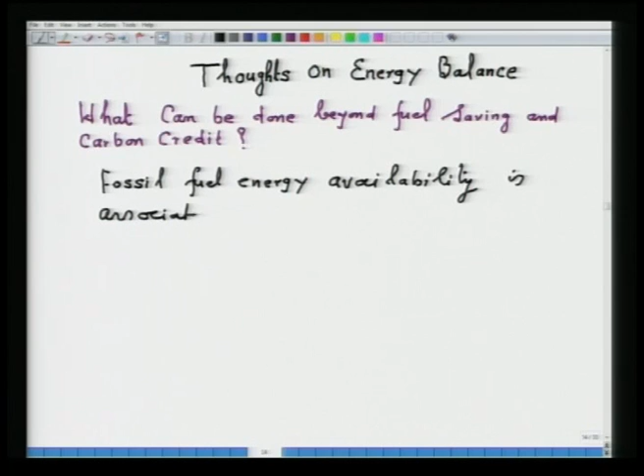is associated with discharge of CO2 in the environment along with other harmful impurities. It is also associated with unutilized thermal energy carried by, or rather carried by, say, product. So far we have not paid any attention to the product, and by-products of combustion.

In the product, there are several types of products being produced. For example, you heat the steel, so steel discharges at 1200 degrees Celsius. So the product, depending on the objective, could be steel, it could be slag, it could be coke oven gas, because your objective is to produce coke. So far we have not addressed what can be done by the heat which is carried by the product.

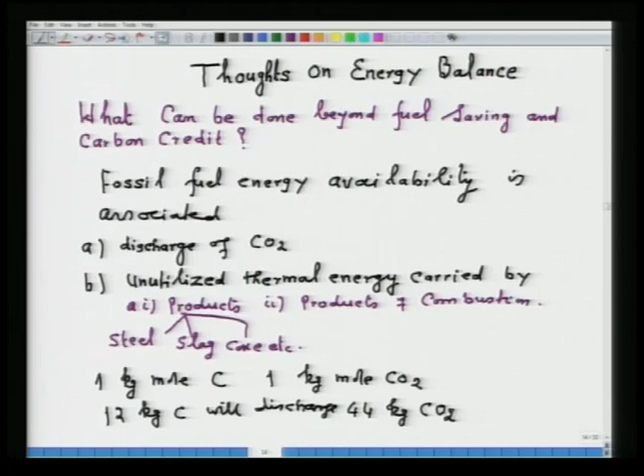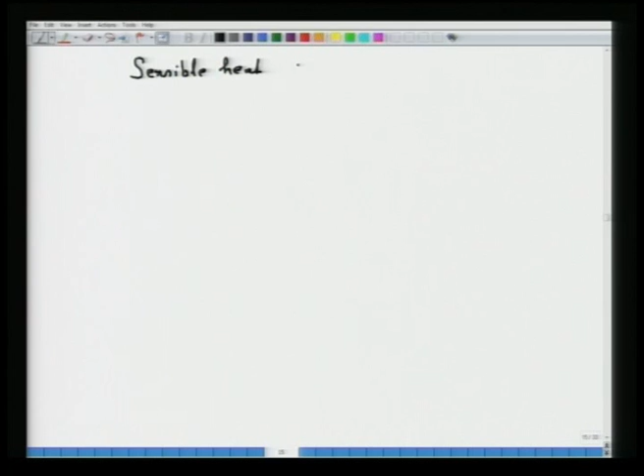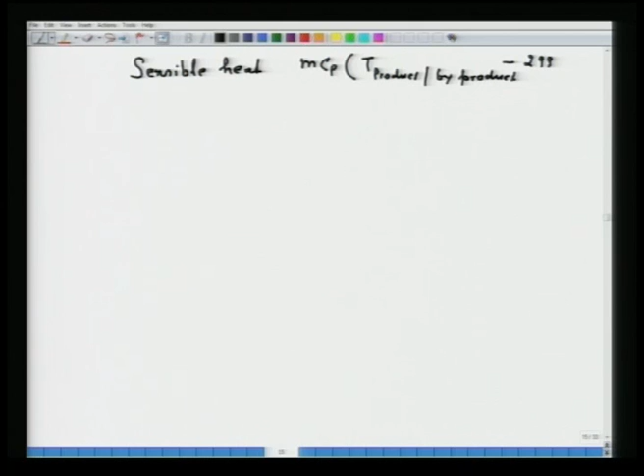This is one particular thing, and also we have said that a large amount of heat will also be carried away by the product and products of combustion, and that heat we call sensible heat. So sensible heat, I am not talking at the moment of calorific value, I am talking of the sensible heat, that is M Cp T of product or byproduct minus 298, if 298 Kelvin is taken as the basis of calculation. Depending on the temperature of the product, a large amount of sensible heat will also be carried away.

We have already addressed what can be done with the sensible heat of the byproducts. We have tried to recover it, recycle it into the furnace, and did a lot of calculation. Now, the sensible heat is also very important. Say in byproducts, for example, the gases are there, and they are discharged also at 1100 or 1200 degrees Celsius depending on the temperature of the furnace. Unless the gases are cleaned, they cannot be used directly. But then what happens to the sensible heat of the product?

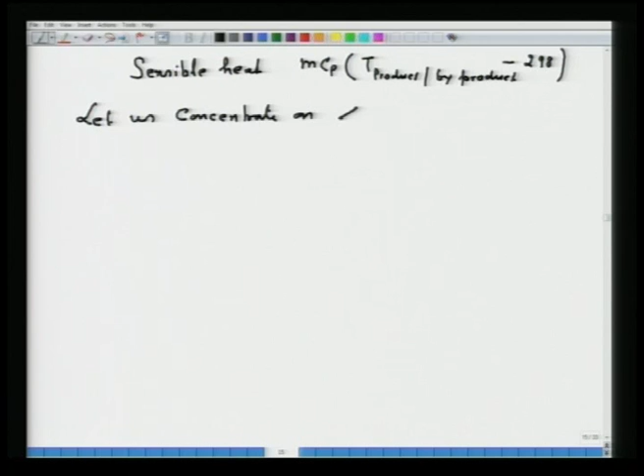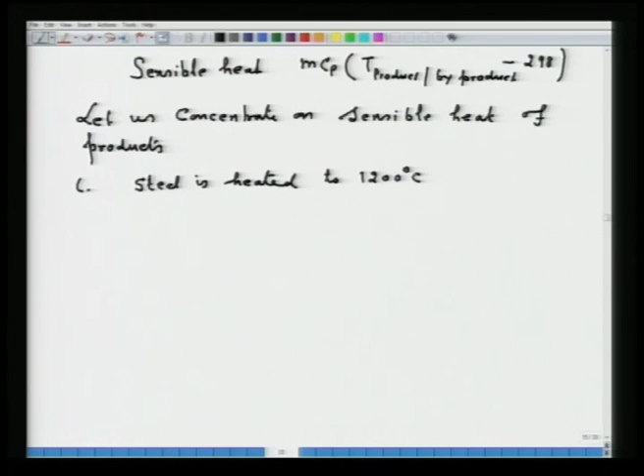Now let us concentrate on sensible heat of products. So the example, for example 1, for thermomechanical processing, steel is heated to approximately 1200 degrees Celsius, and the heat available with the steel is then utilized for thermal mechanical processing, that is for direct rolling.

You must have also seen in coke making, coke is discharged at around, let us say, 1200 degrees Celsius. It is very difficult to store the coke at this particular temperature. So for this purpose, coke is water quenched and brought to the temperature of 25 for storing purposes. In an attempt to water quench coke, a large amount of water is used. Water contains large amounts of contaminants, and large emissions due to wet quenching of coke are discharged into the environment.

What I have thought, let us consider coke making and what can be done with the sensible heat of coke. So I will concentrate now my lecture on the sensible heat in coke.

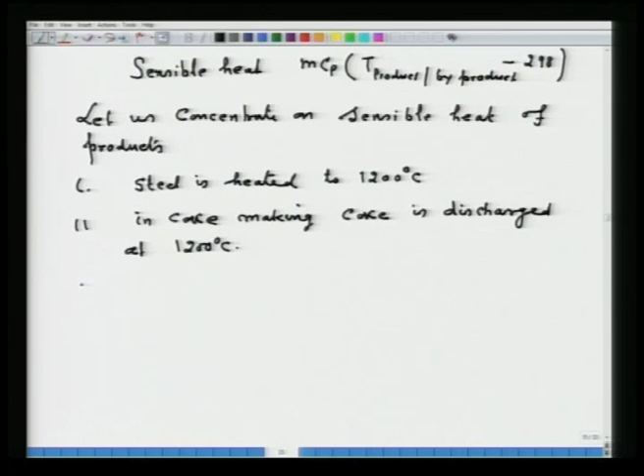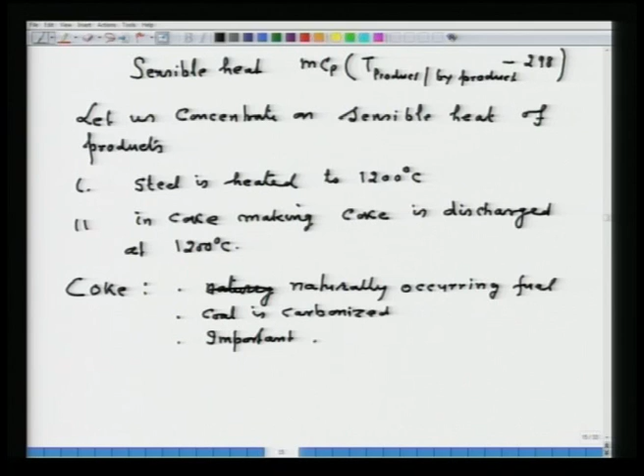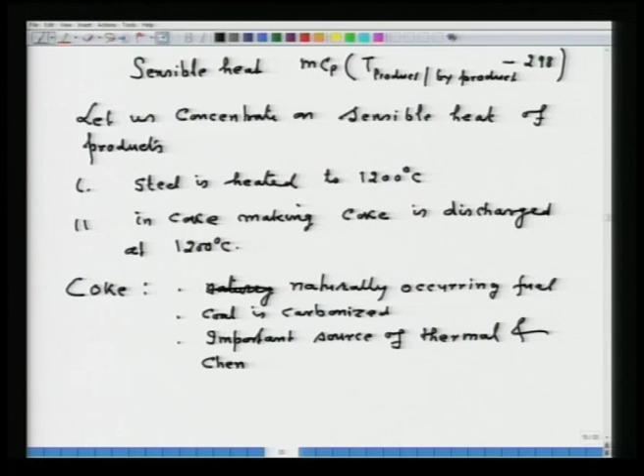Now, first of all, as we already seen in the lecture on coke making, for example lecture 27, coke is not a naturally occurring fuel. Number 2, coal is carbonized; the details you can find in lecture 27. Also, coke is an important source of thermal and chemical energy in integrated steel plants.

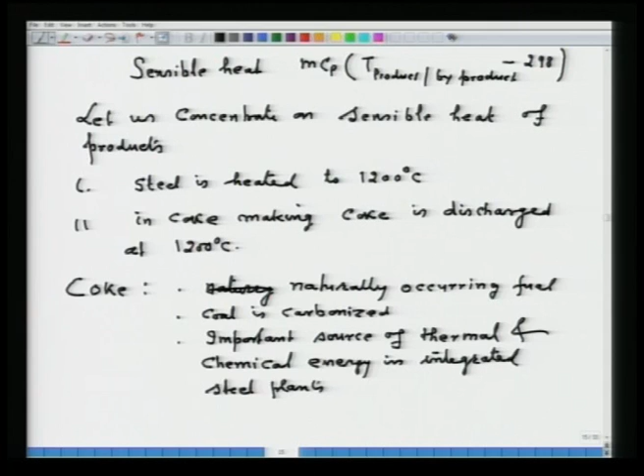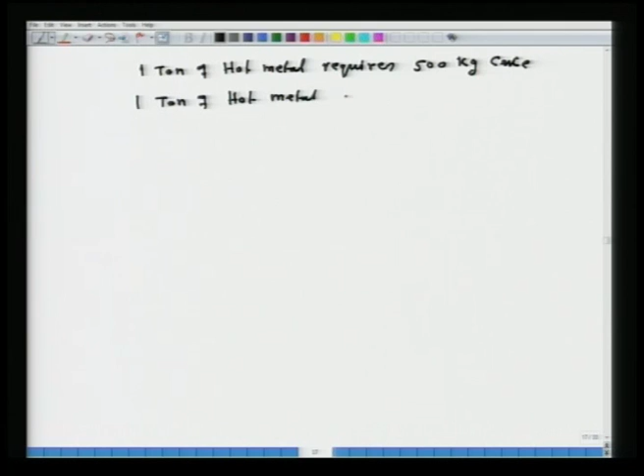Now, just to give you a figure, say 1 ton of hot metal, hot metal meaning pig iron, requires approximately 500 kg of coke. The figure may vary, but I am just taking an example. 1 ton of hot metal produces approximately 0.75 tons of steel. Now, 1 ton of bituminous coal,

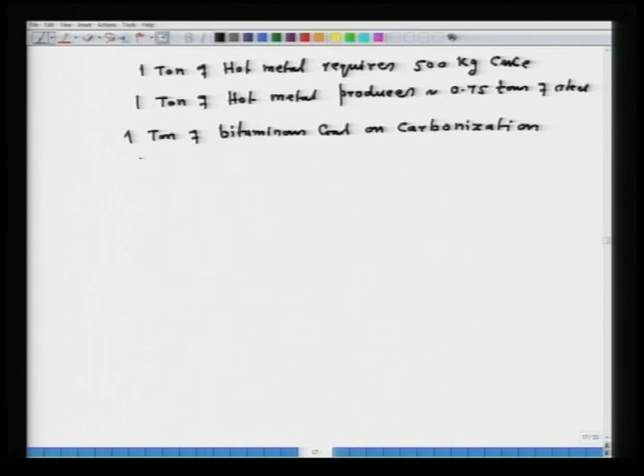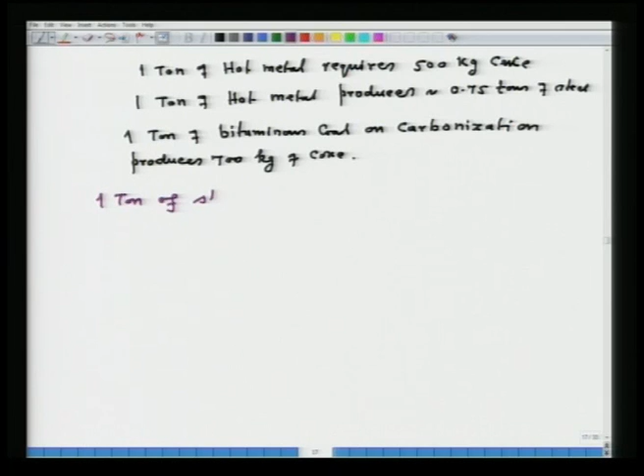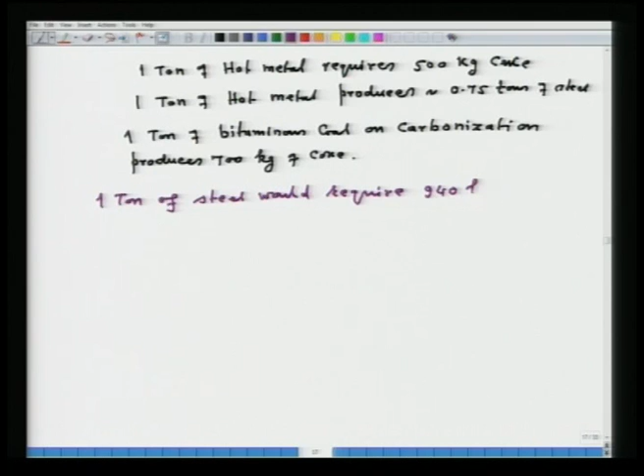on carbonization, say, produces 700 kg of coke. That means, if I combine all together, I can say that 1 ton of steel would require 940 kg of coal. If I take now 10,000 tons of steel, that would require 9,400 tons of coal,

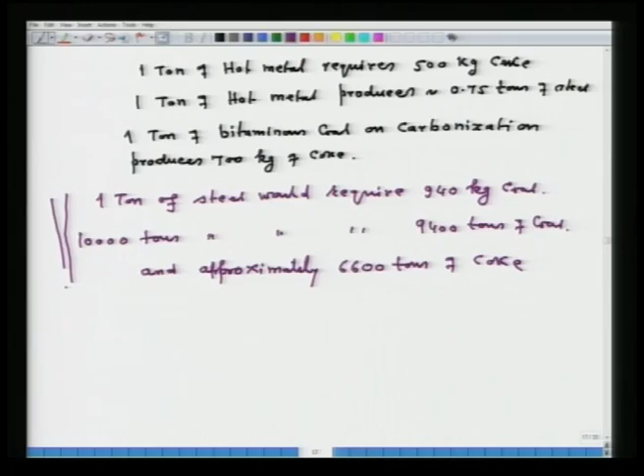and approximately 6,600 tons of coke. What does it mean? You are not producing just 10,000 tons; annually you are producing million tons of steel. A huge amount of coke is required in almost all integrated steel plants. So that means the conversion of coal to coke, and the sensible heat available in coke, is a very important thing to consider in what can be done.

So, what I have thought now, let me give you a heat balance of a typical byproduct coke oven. So let us consider now the heat balance of a byproduct coke oven.

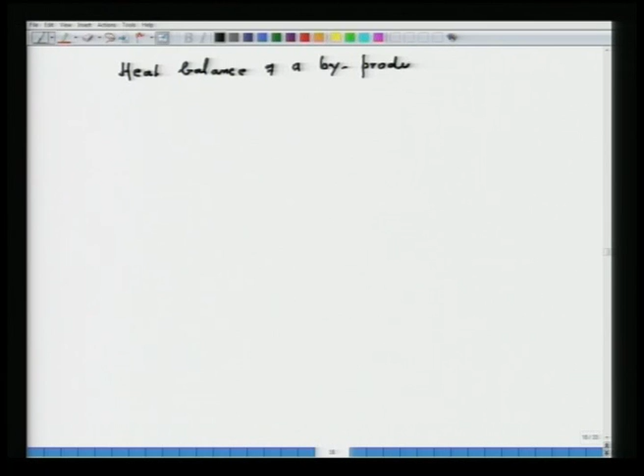Now I have selected heat balance vis-a-vis material balance. First we did material balance in coke making in lecture 27. One of the examples I presented there used the material balance data to illustrate the energy balance, or heat balance, here. So I am putting it now in the form of a diagram presenting the heat balance.

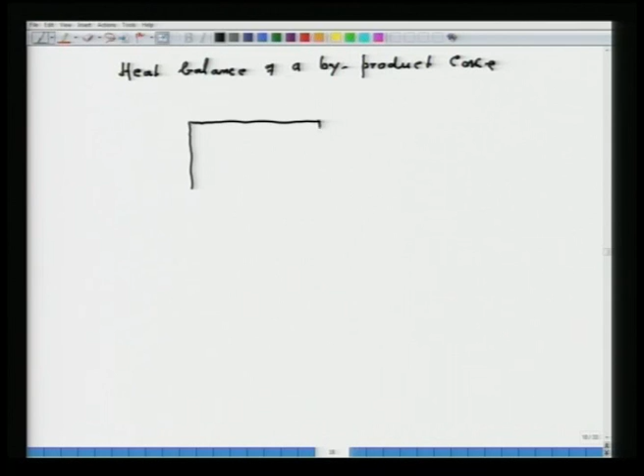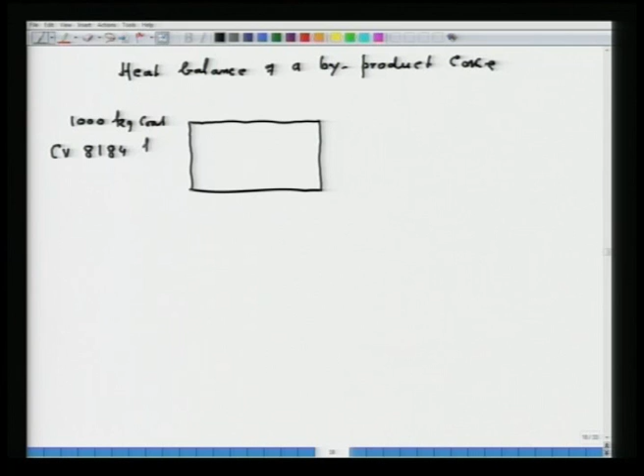So here what we are doing: I am putting 1000 kg coal, whose calorific value is 8184 kilocalorie per kg. CV, as you must know, stands for calorific value.

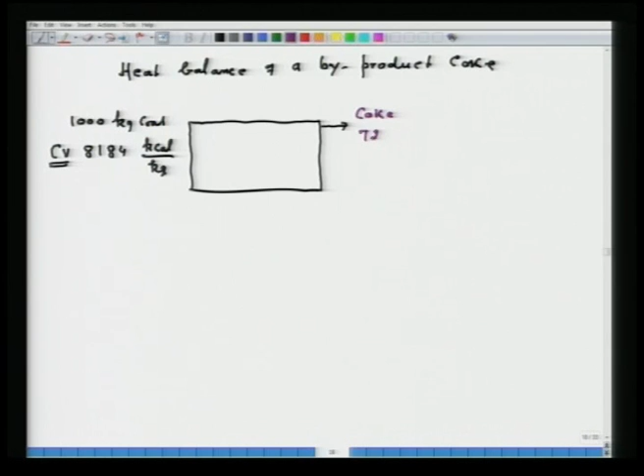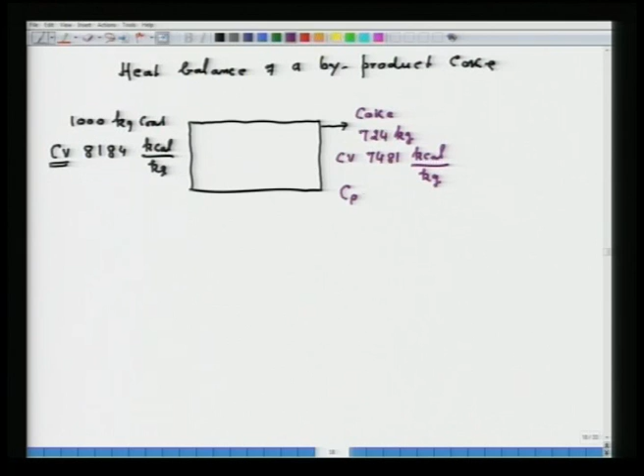On discharge we get coke, its amount is 724 kg, its calorific value is 7481 kilocalorie per kg, its Cp is 0.359 kilocalorie per kg per degree Celsius, and it is discharged at a temperature of 1200 degrees Celsius. That is what we are considering.

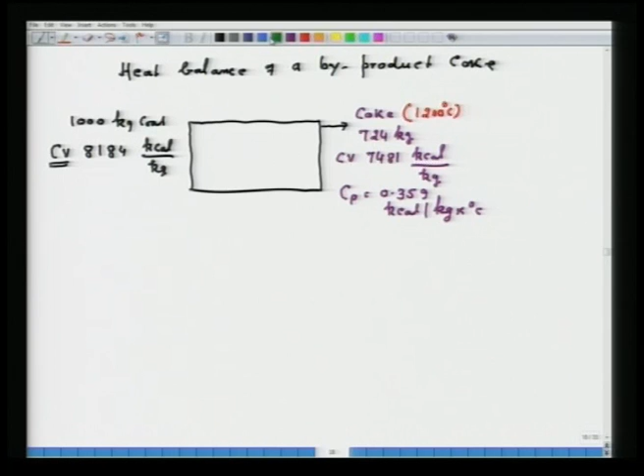Another product, as shown, is tar, whose amount is 40 kg and its calorific value is 8776 kilocalorie per kg. It is also discharged at 1200 degrees Celsius.

Then another product is coke oven gas, whose amount was 349 meter cube, calorific value 113 into 10 to the power 3 kilocalorie per kg mole, and its density is 0.44 kilogram per meter cube.

Now, let us take this coke oven gas: 40% of the coke oven gas is burnt and used to reheat the walls of the byproduct coke oven. You know there is indirect heating involved.

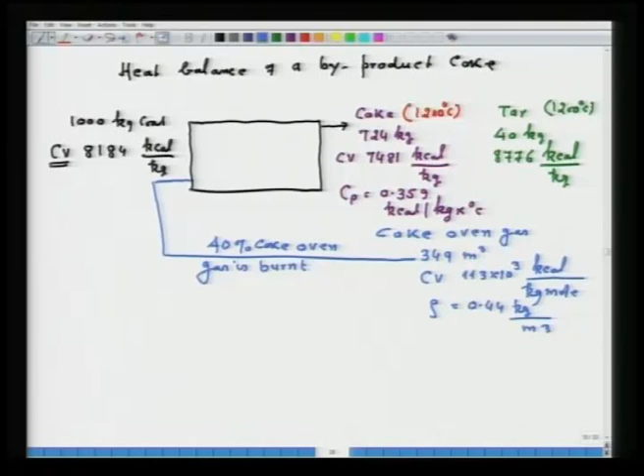Given all these figures, now we can do the heat balance and let us see what the heat balance brings. I will use the next page to do the heat balance now.

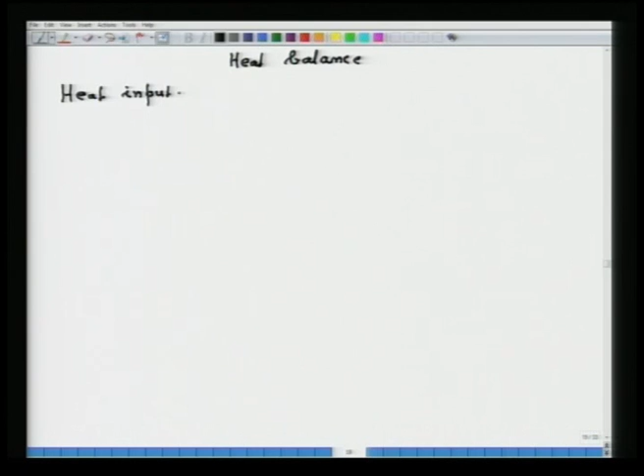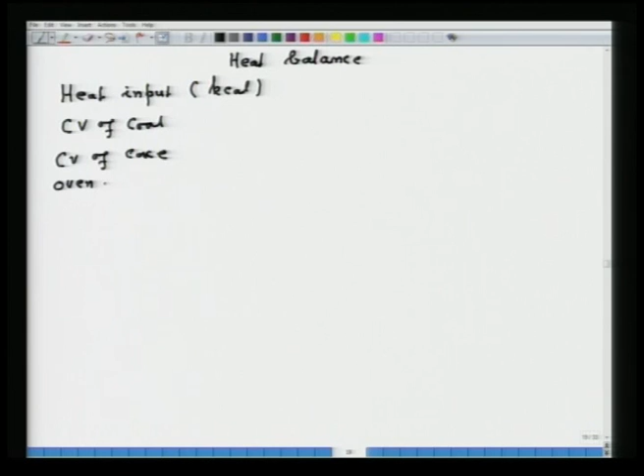Typically, heat input in kilocalorie: CV of coal, then CV of coke oven gas because we are combusting it. CV of coal is 8184 into 10 to the power 3, and CV of coke oven gas is 704 into 10 to the power 3.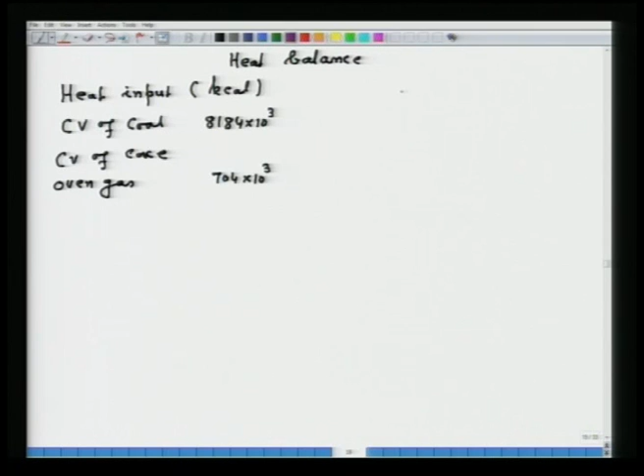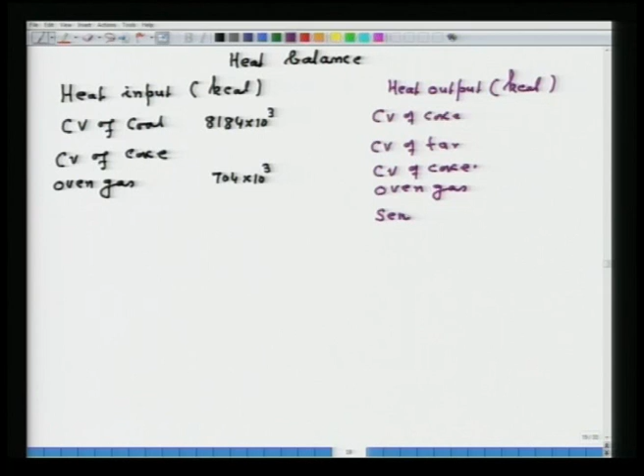Now let us go on to the heat output, again in kilocalorie: CV of coke, CV of tar, CV of coke oven gas, then the important terms sensible heat in coke and sensible heat in coke oven gas.

Now let me concentrate on sensible heat in coke and sensible heat in coke oven gas. The values are: CV of coke 5416 into 10 to the power 3, CV of tar 351 into 10 to the power 3, CV of coke oven gas 1053 into 10 to the power 3, sensible heat in coke 305 into 10 to the power 3, and sensible heat in coke oven gas 174 into 10 to the power 3.

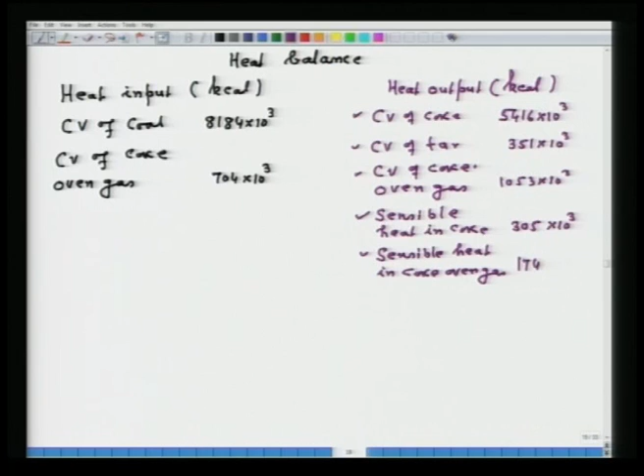This is the heat balance picture before us. The calorific value of coke is not lost even in water quenching; on combustion this energy will be available, no problem. CV of tar is also available since it is potential energy. Similarly, calorific value of coke oven gas is also available, related to potential energy, which you get on combustion.

What about sensible heat in coke oven gas? The coke oven gas contains a large amount of entrained particles, so you have no option except to cool and clean the gas, and you can use only its potential energy. Unless the gas is very clean, the sensible heat of coke oven gas cannot be used. Any gas containing entrained solid particles is difficult to use because it will contaminate the appliances used to recover the heat.

Now, what happens to sensible heat in coke in this particular case? Sensible heat in coke cannot be used because it has to be wet quenched in order to store it; you cannot store coke at around 1200 degrees Celsius.

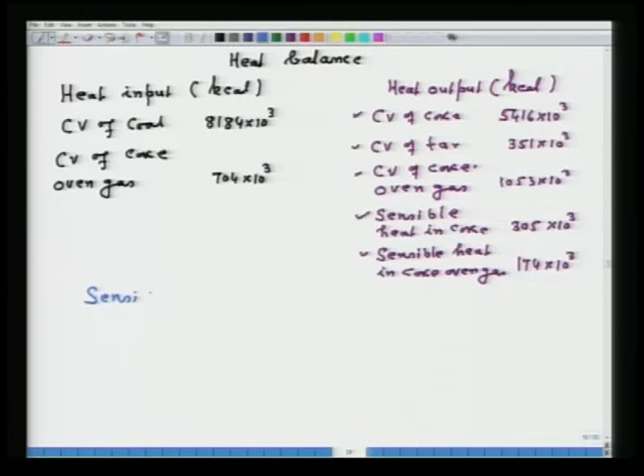So that means the sensible heat in coke, which is very large in amount, is at present 305 into 10 to the power 3 kilocalorie per 724 kg of coke, which is equivalent to 436 into 10 to the power 3 kilocalorie per ton of coke.

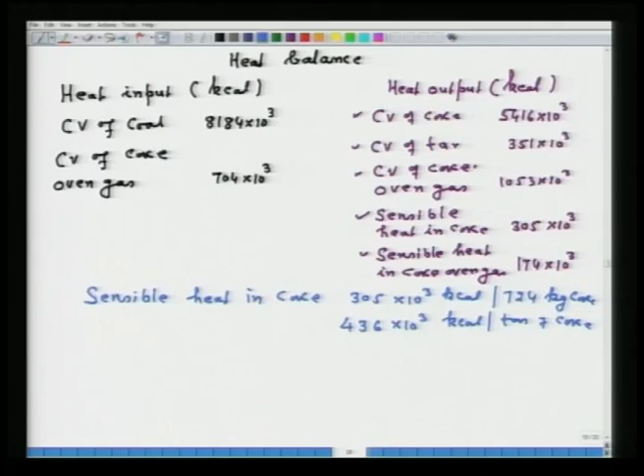What happens on wet quenching? This energy is lost. So what you are doing on wet quenching, one thing is that you are losing the sensible heat, that is okay, but the second thing is that you are harming the environment. You are using a very large amount of water, approximately 0.5 to 0.6 meter cube of water is required

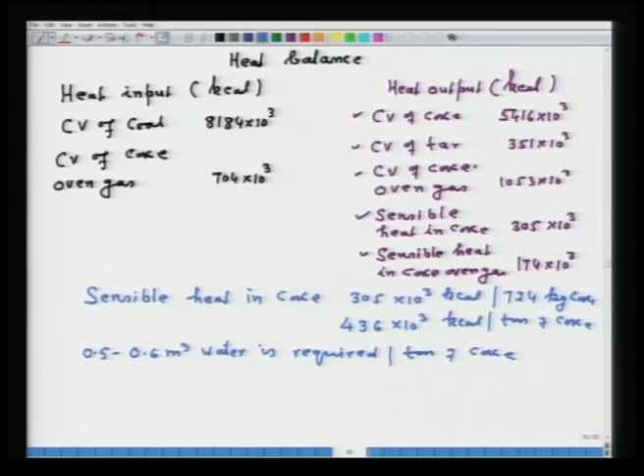per ton of coke for wet quenching. Now, the water is sprayed on the hot surface of coke, which is at 1200 degrees Celsius, the water is vaporized along with the contaminants, because water near the integrated steel plant is not pure, it has a lot of contamination. So all those contaminations are evaporated into the atmosphere. So large amount of emissions are discharged into the environment, along with this airborne coke dust, which is also discharged in the environment.

Now, considering the amount of coal which is carbonized per day in a plant, it could be 10,000 tons or whatever. You can imagine the amount of heat which is being lost by wet quenching and the emissions which are being produced in the environment. Do not you think that this particular heat balance which you have done provokes you to think, can we do something on the sensible heat of coke? Is it not possible to do something on the sensible heat of coke, which is largely going to waste, not only waste, but it is also polluting the environment?

Do not you think that this heat balance exercise that you have done for the coke byproduct coke oven plant helps you to innovate or to think along the lines that can we do something to use the sensible heat of coke?

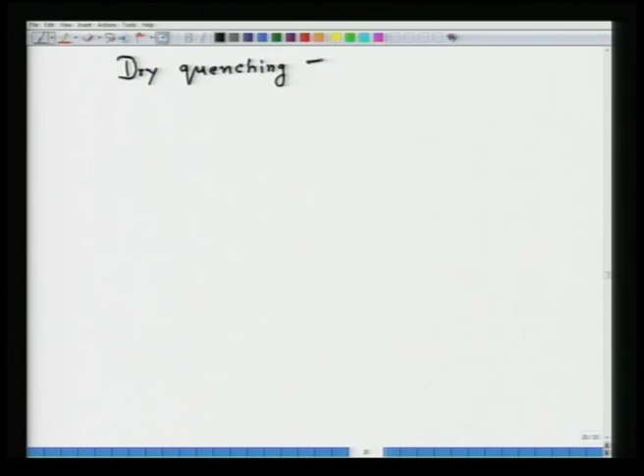So that is what my objective of this particular lecture is, to provoke you to think, after doing the heat balance, can we save energy? Number one. Number two, can we contribute to environment sustainability or not? And that is quite possible. You are seeing now also here the magnitude of the heat that is available, that is important.

So this is a thought process which has given the so-called dry quenching technology, and dry quenching technology can also be considered under the Kyoto Protocol as a technology which contributes to clean development mechanism. In short, it is called CDM. There are several clean development technologies, sintering, pelletizing. This is one that I will illustrate, what can be done by performing heat balance of a high temperature process. So dry quenching technology, you can call it a technology which contributes to clean development mechanism, which means that this technology reduces the emissions in the environment.

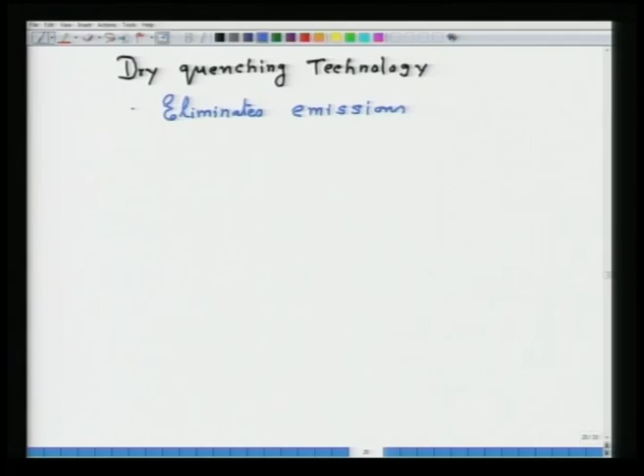So in fact, the advantages of this dry quenching technology: first of all, it eliminates emission, because now you are dry quenching, maybe you have air, but you cannot use it because that will react with the coke. You are using an inert gas, could be argon, could be nitrogen, whatever. So it eliminates emission.

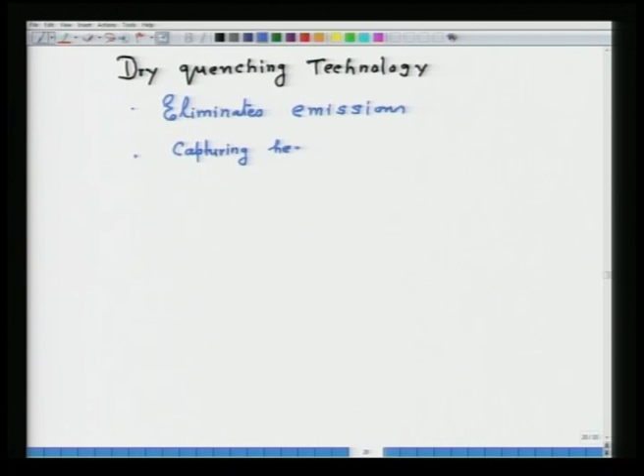And the second important thing that you are doing by dry quenching is that now you can capture the sensible heat and reuse it. That means you can invoke the basic concept of energy security and environment sustainability, which is capture and reuse. So the second thing that you are doing is capturing the heat and reusing it, that is called cogeneration.

Well, this is an idea which has emerged. This can be done, these are the benefits. Now comes the question of development of technology, because when you talk of the technology, it is related with the finances. That technology should be workable.

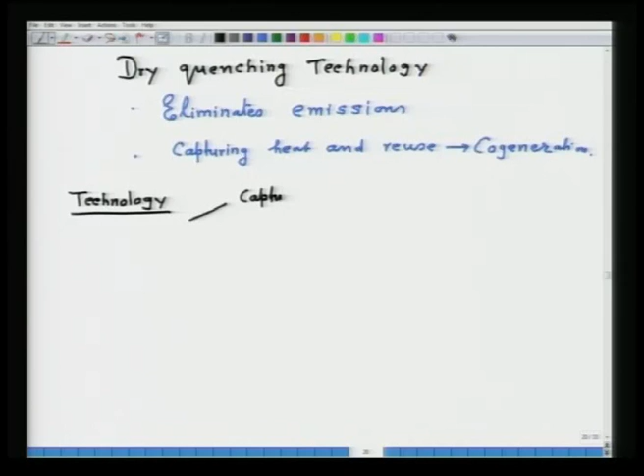Now, this is a well established technology, but what I am telling is those ideas, if they are to be translated into the technological thing, then several other things are required. Now, this technology should have at least two components. One component is capture of sensible heat.

This can be done in a system where the gas is flowing counter current to the flow of coke. That is, you have to design a reactor where coke may be flowing from top and discharged from the bottom, and the gas is flowing from the bottom in the reactor and discharged from the top, because a counter current mode of heat exchange is a very, very efficient method of heat transfer. So the one component it should have is capture of sensible heat.

However, you have to have a mechanism to charge the coke, to have an inlet for gas and so on. They are part of the technological development, but the important component is the capture of sensible heat. Of course, here a counter current mode is very effective.

A counter current mode is effective, but then you have to synchronize with the flow, or with the amount of coke that is dropping and the amount of gas, and this synchronization is a part of the development of the technology.

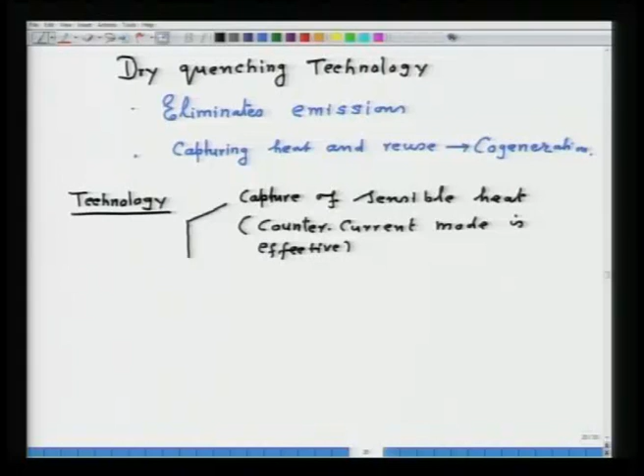Another component is, well, what have you done with this? You have passed the gas at 25 degrees Celsius and coke, for example, at 1200 degrees Celsius. You allowed enough residence time so that the gas is heated, for example, to 400, 500, or 600 degrees Celsius. What will you do with that gas?

Now you have a gas which is superheated. I mean, I do not use the term superheated, but it is heated to 600 degrees, depending on the residence time and height of the reactor it may go even higher. 600, 700 degrees Celsius, you have heated the gas. What are you going to do with that gas?

So the second component is to use the heat which is available to you in the gas to produce, for example, superheated steam. Or there could be other uses also, you want to heat some appliance or something, anything could be, because now you have the heat available in the flowing gas, and it has to be used. One of the important uses is to produce superheated steam.

Now, superheated steam means, because you have a temperature of 600 degrees Celsius of the gas, and water evaporates at 100 degrees Celsius, if it comes into contact, the evaporated water may be at 300, 400 degrees Celsius. So it is superheated steam, and a large amount of pressure will be generated.

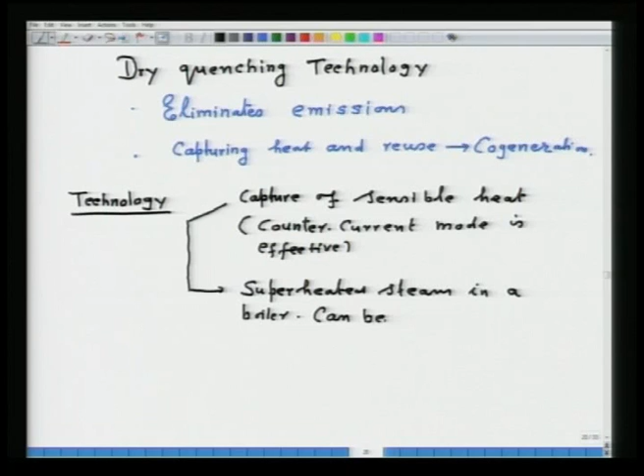For example, this superheated steam can be used to run a turbine. So what I mean to say is that these are the technological challenges which have emerged out of the heat balance, after giving a sincere thought to what can be done with the available heat.

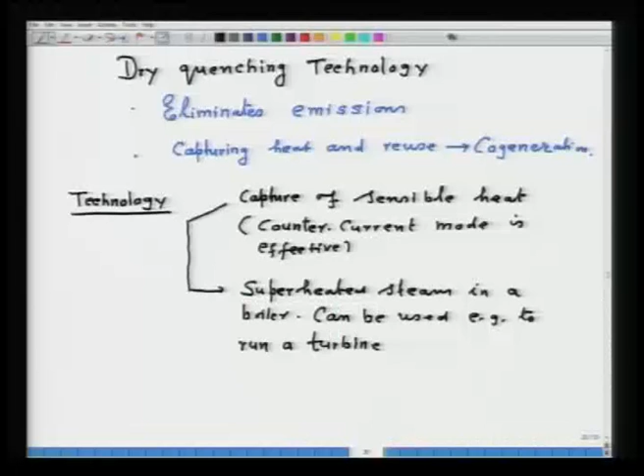Now, I will give you a flow diagram of a technology which works on dry quenching. So here what you have, say you have a reactor, for example this is the reactor. Here you have the so called coke ejector, and here you have a hopper. Here the coke, at for example 1050 to 1100 degrees Celsius, is charged.

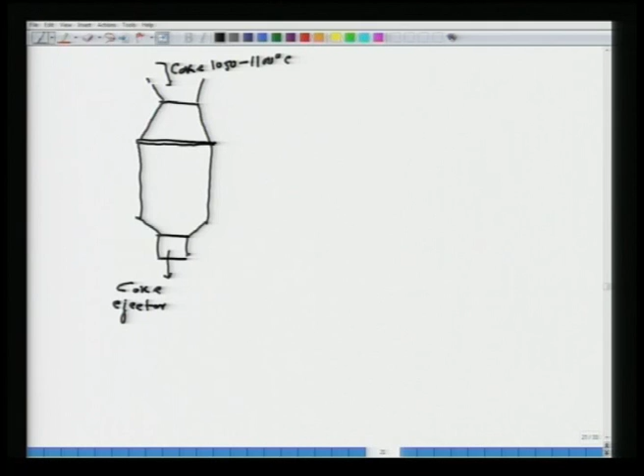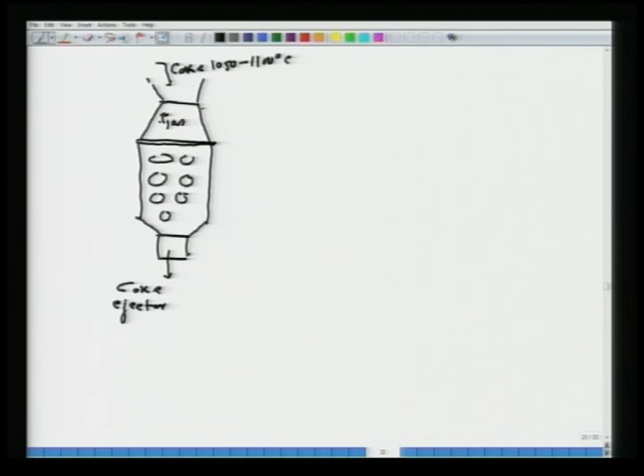So the coke moves downward as heated coke, downward and cooled, and coke is discharged through the bottom. Now, say the hot gases from here are collected here, and the hot gases are taken to a boiler. So this is the line for hot gas, and somewhere here you have a primary dust catcher.

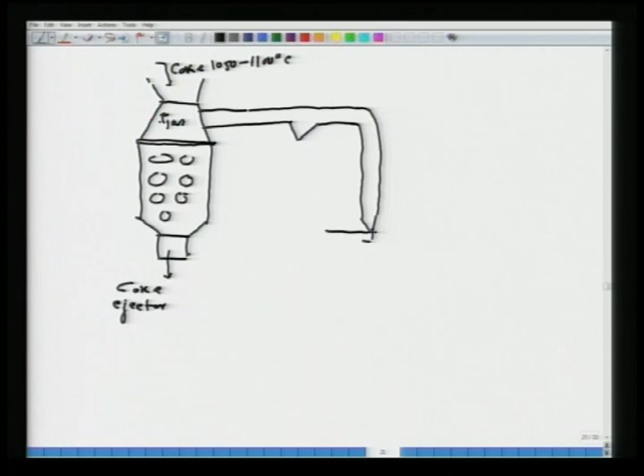So this line enters into a boiler. This is sort of a boiler. So this is the gas, it passes here at a temperature of 800 to 900 degrees Celsius, and this is the primary dust catcher. It is important to remove the dust, this is the primary dust catcher.

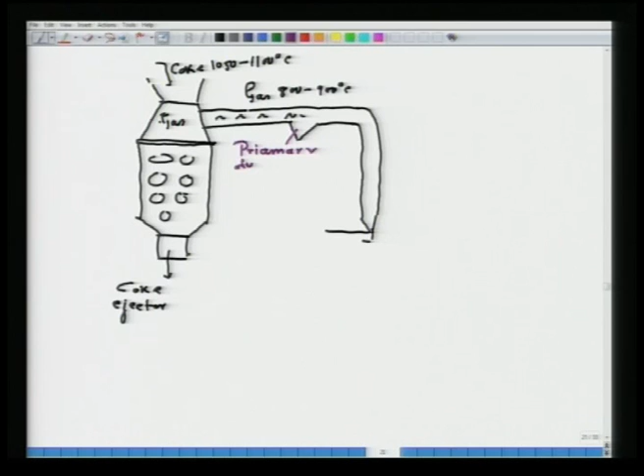What I mean is, these are the components of the technology. You have a reactor, you have the gas flowing pipeline, you have the primary dust catcher which removes the dust, then you have to pass through the boiler so that the water gets heated up.

Now, the gas which is cooled, say it may not have 800 degrees temperature anymore, it may be around 170 to 200 degrees Celsius. You have to think what you are going to do with that gas. So now, say another dust catcher, this is the so called secondary dust catcher.

Secondary dust catcher, you require this because you have to be sure that the particles which are there do not contaminate the boiler and so on. So you require all these small things, but then you must think you might also require a pump to boost the pressure so that the gas can flow. So this may be a pump over here, a sort of gas circulating fan.

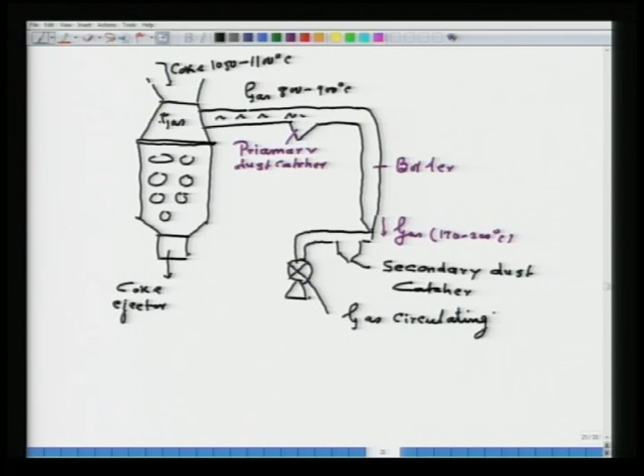Gas circulating fan. From here it goes to a preheater. Let me draw it. This is the one, just a preheater, and from the preheater the gas again enters over here. So here again the gas, and this is the so-called preheater. And the coke ejector - now the coke comes out at around 200 degrees Celsius.

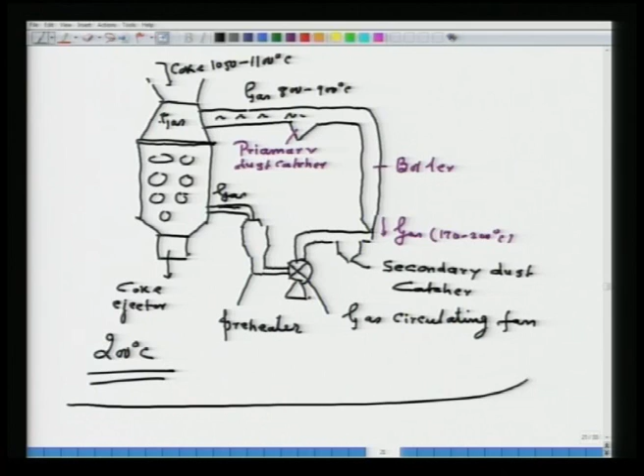By developing this particular technology, called the dry quenching technology, you have contributed not only to recover the sensible heat, but also created an environment where steam can be produced and a turbine can also be run. So this is a typical example of this.

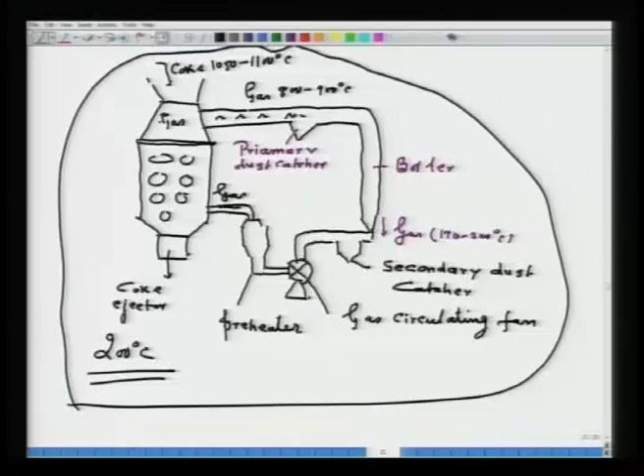So let me now illustrate another example of fuel saving, though I have illustrated it in my earlier lecture, but I thought let me do it once again here. I will take a different problem, say a second case. Now consider the heat balance

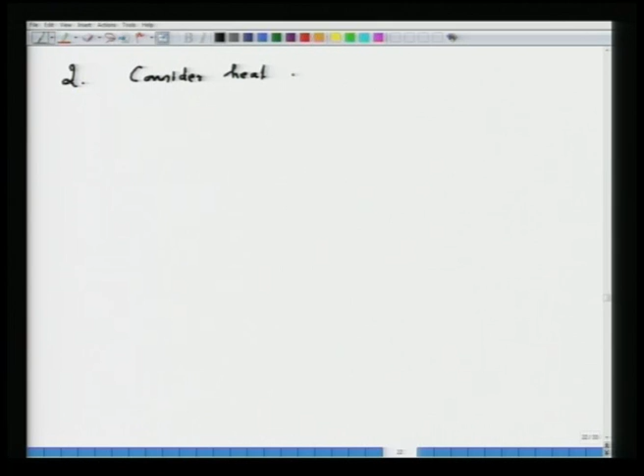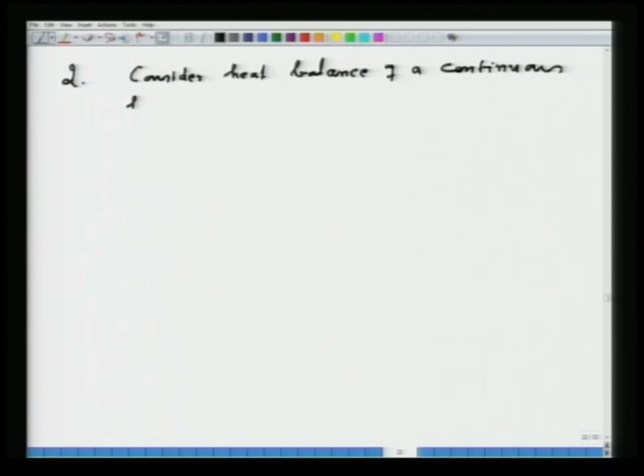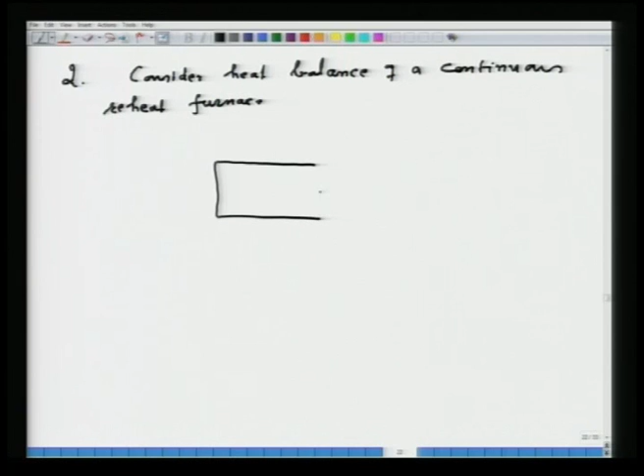of a continuous reheat furnace. I will not go into detail of all the calculations, you can do it yourself based on what I am representing. So let us take it now. This is a reheat furnace, which is used to heat steel to, for example, 1400 degree Kelvin, typically for rolling operation. Now this furnace is, let us say, oil fired.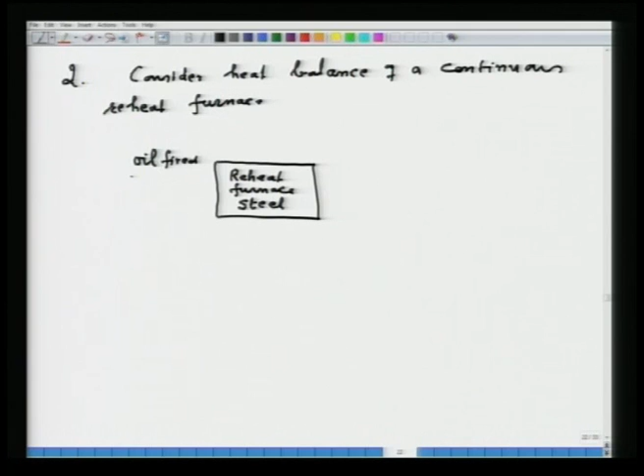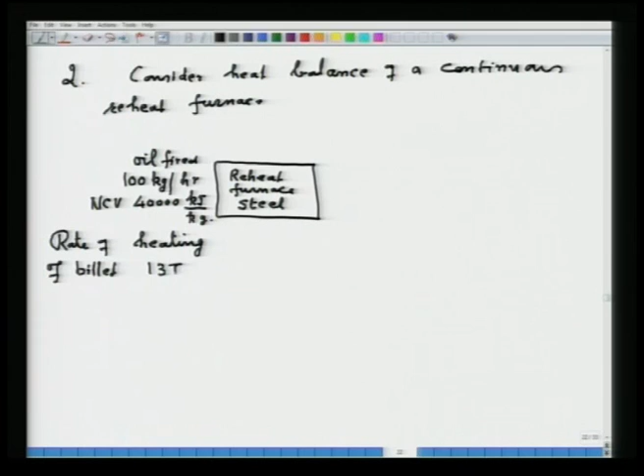This furnace is oil fired, and consumption of oil is 100 kg per hour. Its net calorific value is 40,000 kilojoule per kg. Rate of heating of billet, say it is 13 tons per hour, it is a huge furnace, and the composition of oil, let us say carbon 85%, hydrogen 14%, and sulfur is 1%.

Now I have calculated the heat output, for example for steel, and that is 5.63 into 10 to the power 5 kilojoule per hour. You can calculate from mCp delta T, m is already given to you, which is 13 tons per hour, and the temperature, the discharge temperature of steel I considered here is 1500 Kelvin. So that can be done because we have done it at several places.

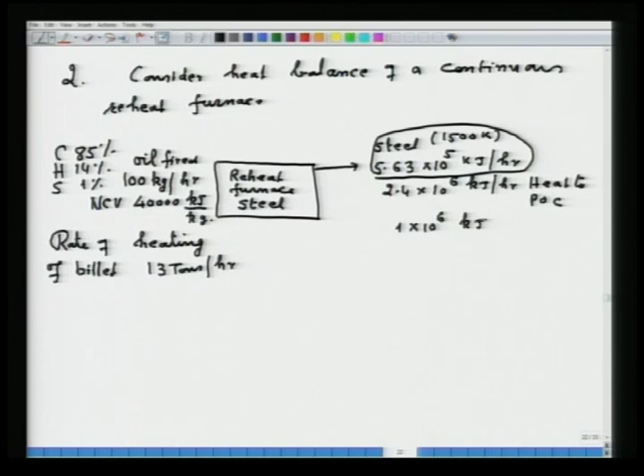Then 2.4 into 10 to the power 6 kilojoule per hour is heat to POC. Now this much amount of heat is taken away by the steel. Then 1 into 10 to the power 6 kilojoule per hour is the amount of heat losses.

Now some data I am giving here: what I have taken as Cp of POC, I have taken the average Cp of POC, that is 1.05 kilojoule per kg Kelvin. The amount of POC you can calculate, that is 19.25 kg per kg oil.

Then amount of air, that is equal to 25% excess than theoretical. So given this data you can do this calculation. My objective here is to show you, by calculation, in this particular scenario where we are not using any heat, then the fuel consumption is 100 kg per hour.

Now again, if we see this heat balance in this form, you note that the heat which is taken away by the steel - nothing can be done about it. Only the steel is directly taken to the rolling mill, so you do not require to again give heat for rolling purposes, that is one. Heat losses, well, you also cannot do much because it is limited by several parameters - water cooling, opening of the door, through the walls and so on - these also cannot be changed.

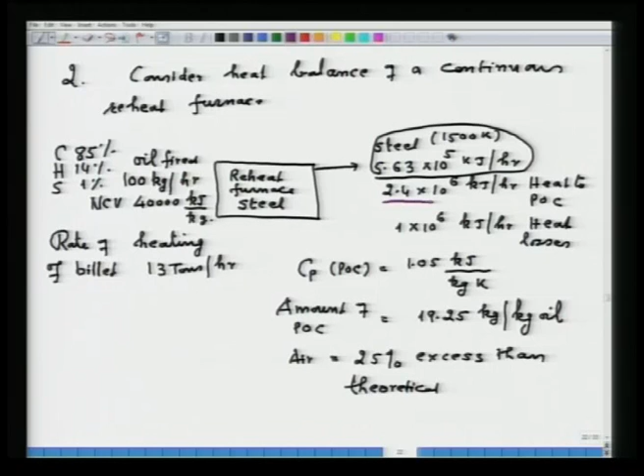Now, if you think in terms of bringing down the fuel consumption of 100 kg per hour to a lower value, the only alternative that seems applicable in this scenario is what can be done with the heat to POC. What I mean is, if you are working in a plant or a rolling mill where rolling is done, steel is heated to that temperature and they are not using that particular heat, the heat balance is before you. So you should think about what can be done to bring down the fuel consumption in the existing furnace.

Mind you, I am talking of an existing furnace, and from this heat balance it comes to your knowledge that 2.4 into 10 to the power 6 kilojoule per hour of heat is being taken by the POC. So naturally this heat balance gives you an idea - why not capture and reuse the heat simultaneously.

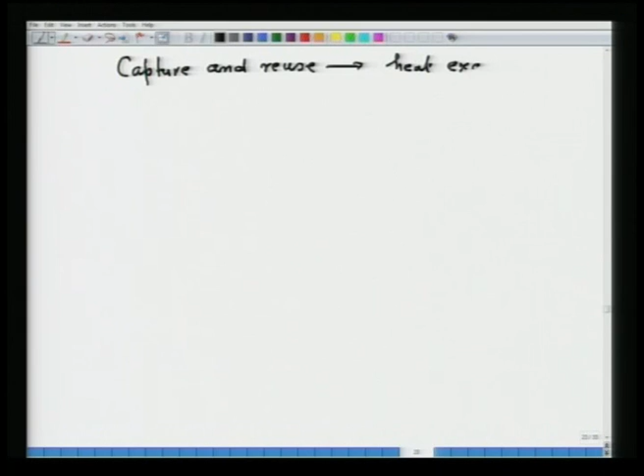So the concept of simultaneous use - capture and reuse, simultaneous capture and reuse concept of unutilized heat - it can only be done by installing a heat exchanger. So what my idea of going through this presentation is very simple: to provoke you into thinking that after doing a heat balance you should exercise your mind to think about what can be done. So simultaneous capture and reuse can be done through a heat exchanger. Now I will show how much fuel can be saved by using a heat exchanger.

So that means, without going further, this is my furnace, and to this furnace I am attaching a heat exchanger. So this is a heat exchanger.

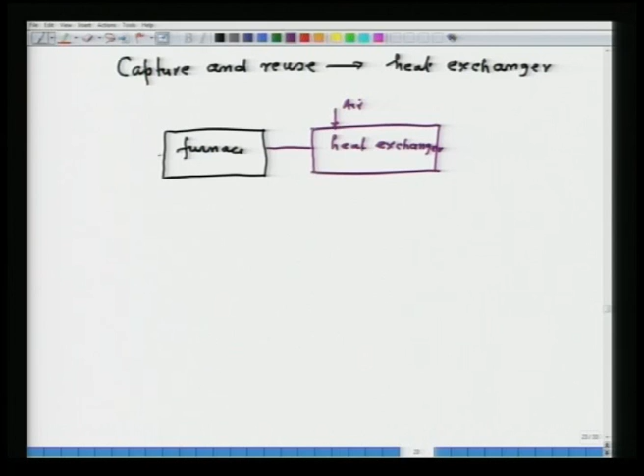This is a furnace, with the same amount of POC that we have calculated earlier. Here, say I am putting air at 25 degrees Celsius, and it is preheated air.

This preheated air is now passing into the furnace. Rest all parameters are same, heat to steel is same, heat losses are same, only air is being preheated by the heat recovered from the heat exchanger and transferred to air.

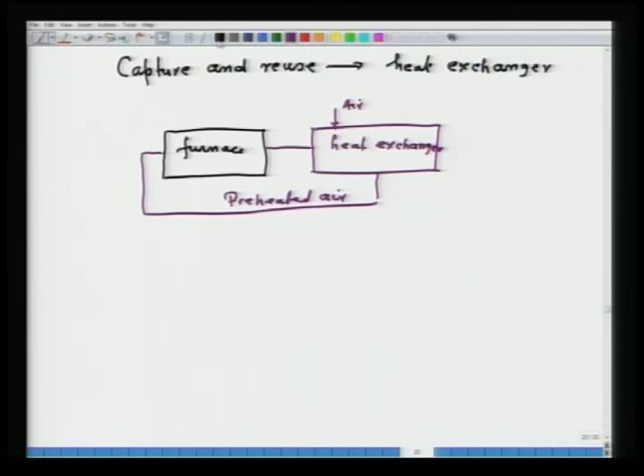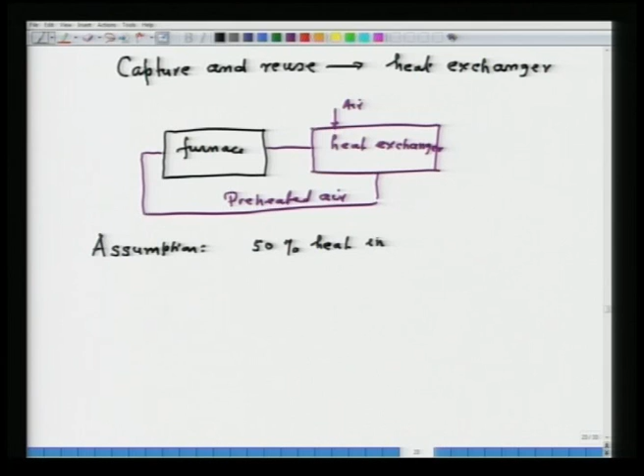So here is an assumption, although we can calculate it too, but I am assuming that 50% of heat in POC is recovered and transferred to air. That means our heat exchanger is working at a capacity such that it can recover 50% of heat and transfer all of that 50% to the incoming air.

Naturally, since additional heat is being supplied to the furnace, we are not changing the rate of heating of steel, so we are still keeping 13 tons per hour as constant. Since we are supplying additional heat, we are not allowed to increase the temperature of steel, so the only alternative is to reduce the fuel consumption. There is no other way, otherwise the temperature of steel will increase because you are supplying additional amount of heat.

So let us consider now F kg per hour is our revised fuel consumption.

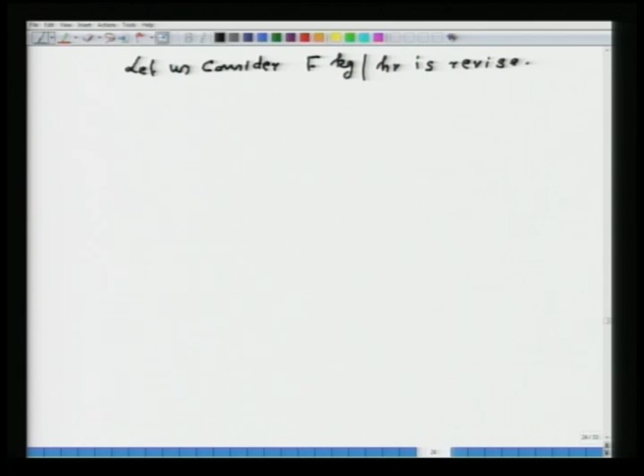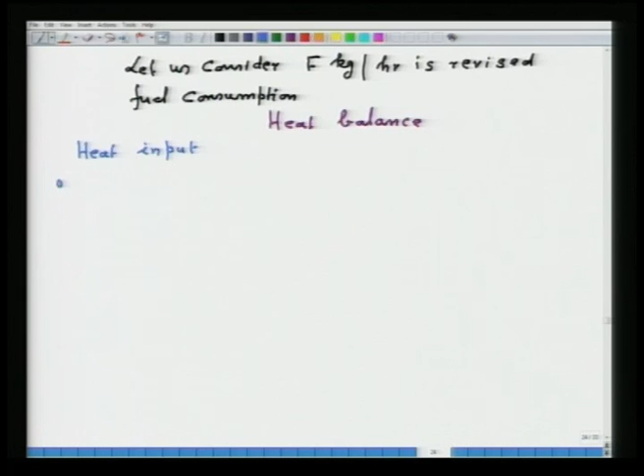Now we can do heat balance. Let us see what heat balance gives us. For the heat balance, we take one heat input, and heat input is the oil combustion, that will be in kilojoule per hour. Now F kg per hour, so it will be 40,000, which is the calorific value, into F.

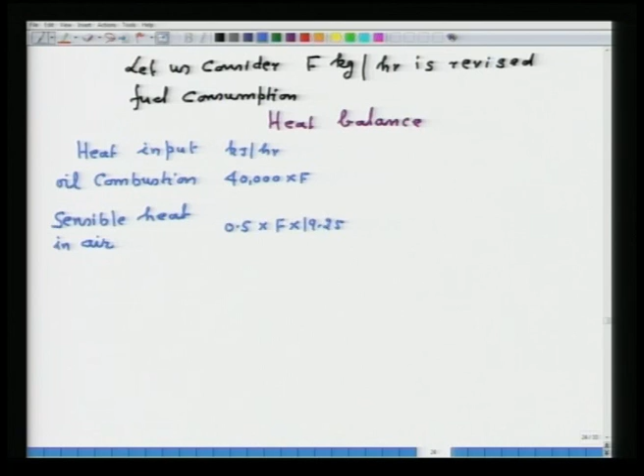Sensible heat in air: we are recovering 50%, so it will be 0.5. Our products of combustion, that will be F into 19.25, that is our kg per kg, into 1.05 is its heat capacity, discharged at 1500 Kelvin. So 1500 minus 298 into 1202, that is our sensible heat in air.

Now let us see heat output. As I said, the rolling mill has to work as it was working earlier, so heat to steel will remain same: 0.563 into 10 to the power 6 kilojoule per hour. Heat losses will also remain same, as in our earlier example, 1 into 10 to the power 6.

What about heat to POC? That will change, because now our fuel consumption is F kg per hour, and 19.25 kg per kg of fuel is the amount of POC, into its specific heat 1.05, into 1202. So that is the heat to POC. That is the heat balance before us.

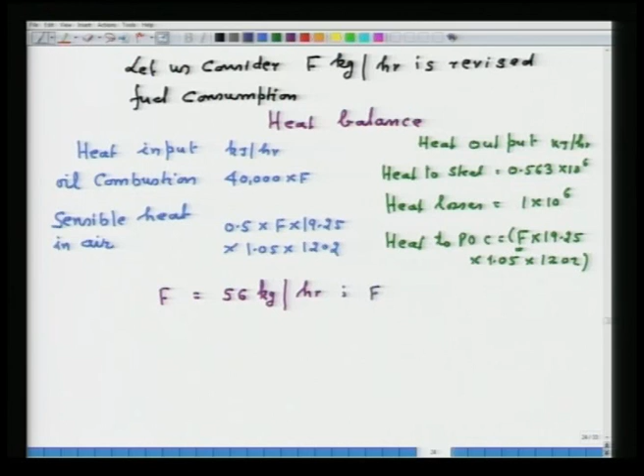It comes to 56 kg per hour. That means the fuel saving, at least on the calculation front, is equal to 44 kg per hour.

Now you can extend this: if the furnace operates say 15 hours per day per month, how much you can save. What I wanted to illustrate through this example is that you just think beyond after performing the heat balance. That particular exercise will give you many innovative technologies. I have given two examples, one in case of coke making and another in case of reheating furnace. These are the important things I thought I would illustrate.

Now, to complete the problem here itself, you can perform a revised heat balance, no problem. You can do it now, revised heat balance with heat input and heat output, but that is not my objective.

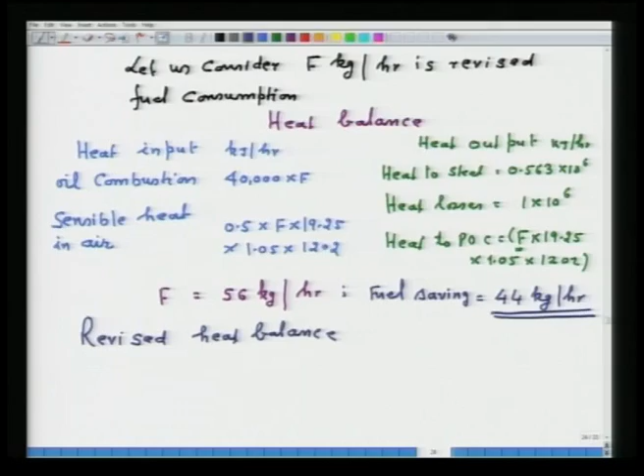My objective is simply to provoke you that wherever you are in the plant, where high temperature appliances are present, you must make an attempt to do the heat balance and not stop just by doing heat balance, but think beyond. Analyze each heat output step and see what can be done.

Here the concept of capture, concept of reuse, and the third concept which we have not explored over here is the concept of switch, that is, from fuel oil can you switch over to another type of fuel or a mixture of fuels. So these are the three concepts along which you must analyze your heat balance, and that is the objective of this lecture.

Now, with this, I hope that some of you must be encouraged to do this exercise, so that my lectures will be useful.